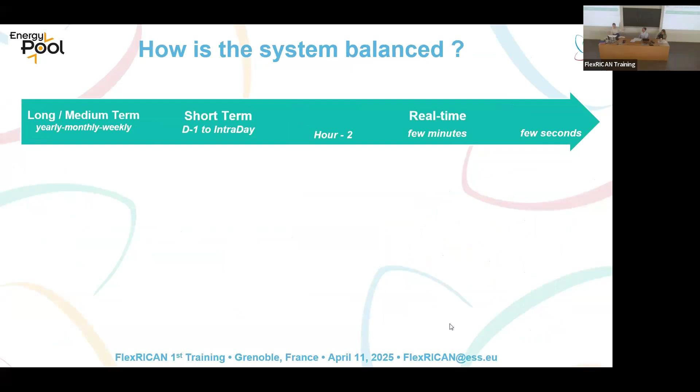Every asset needs to be attached to a balance responsible party, and they have a financial incentive to be balanced and usually penalties when they're not balanced. So how exactly does balancing work and how is it done? You have different temporalities. On the long and medium term and on the short term, it's the balance responsible parties that take care of the equilibrium. On the long term, they balance using futures and term markets.

An example is through EEX. And on the shorter term, so day ahead and intraday, they use the spot or intraday markets. An example of a platform is EPEX Spot. They use these markets to balance their perimeters, but closer to real time, let's say 2 hours before real time, the TSO is going to take over that job. The transmission system operator manages the balancing from about 2 hours before real time, the delivery time.

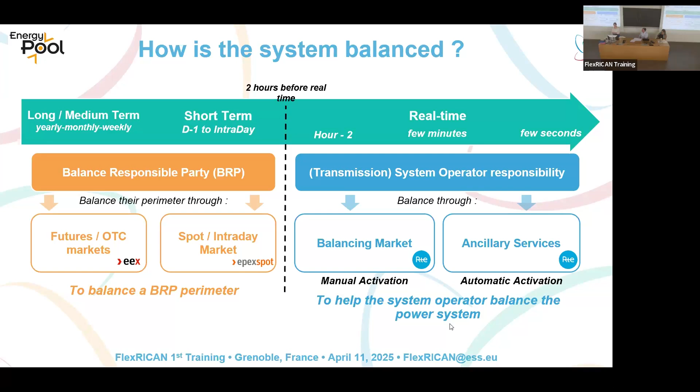They use balancing markets, where they procure balancing capacity and balancing energy, and ancillary services, which we're going to go over very quickly, which are services specifically tailored to manage the frequency of the network. This is all to help the system operator balance the power system. I gave the example of RTE, but it is also the job of Svenska Kraftnät in Sweden, MAVIR in Hungary, and ČEPS in Czech Republic. They all have that same job to balance the network on the short term.

So exactly what is flexibility and why do we need it? Marion already introduced the first definition. We can separate production side flexibility and consumption side flexibility, but technically they all work the same way in the end. For a production asset, flexibility is its capacity to increase or decrease its production to answer different signals. That can be market signals, the market price, or system signals, for example through the balancing market. Historically, production units are mainly used to procure flexibility in the system.

Now we see more and more demand-side flexibility appearing, which is the same definition. It's the capacity of a consumer to increase or decrease its consumption to answer system needs or market price. This is also called demand response. This is different from energy efficiency, which is more about lowering your consumption for the same output, if you will.

So this demand response can be done through peak shaving, which is you just curtail your peak load. It's quite simple. You can do peak shifting, which is reporting your load at another time. So you do not consume when the network needs you to not consume, and you will consume at a later time when the network doesn't need you to stop your consumption.

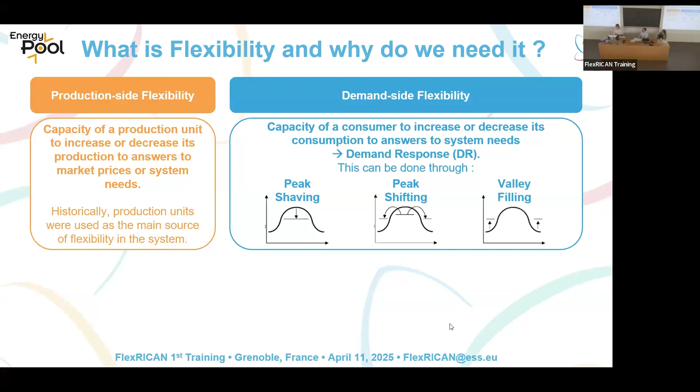Why exactly do we need demand-side flexibility now? So with the energy transition, we see an increase in renewable energy production and an electrification of uses in industry and in transportation. This leads to new challenges for the system. You have a decrease in production flexibility because most renewable energy is not very flexible. Mainly solar and wind production can be not very flexible. And you also have with the electrification an increase of electricity consumption, especially during peak hours.

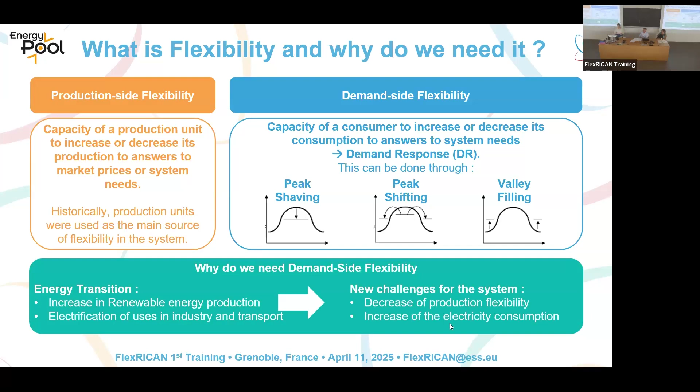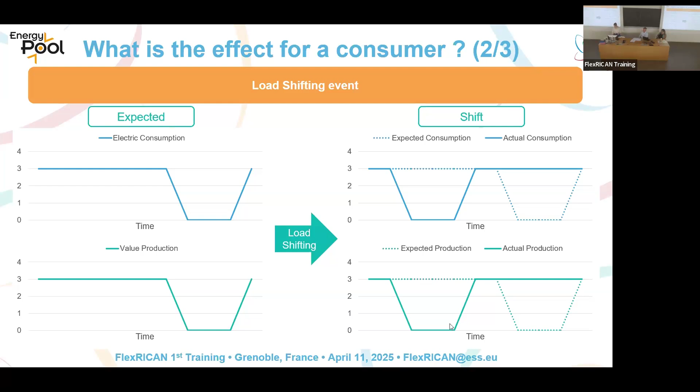You're going to shed your load here, but you're going to want to still produce your expected production. So you're going to consume at a time where you were not supposed to consume. This may not lead to loss in production, but usually you need to have a bit of rescheduling and reorganization.

Another final effect is, so I presented mostly the case of curtailment, load shedding, but there is also a type of flexibility that you can have, which is linked to continuous frequency adjustment. So this is not really just, oh, I'm just going to stop consuming right now. It's more of, let's say, I have the information about how the frequency is doing, and I'm going to adapt, usually in real time, my consumption to how the frequency is doing, so that you can help it go toward your 50 Hz. So this is a continuous service, we do it all the time.

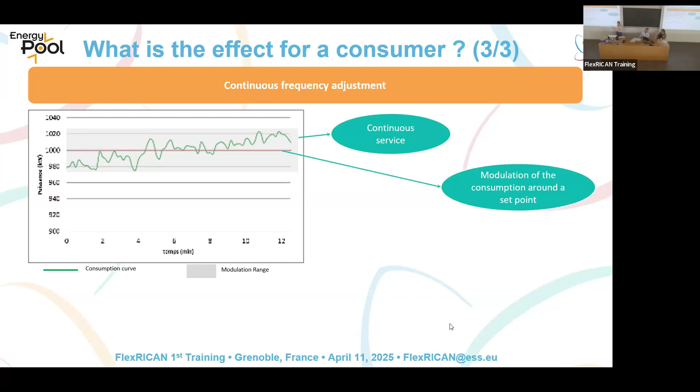You have a set point, which is usually the consumption when the frequency is, let's say, perfect. And you have a centered load around that set point.

This is the sort of modulation that is used in what we call FCR, which is Frequency Containment Reserve, which we're going to see a bit later. It's an ancillary service, and it's used to maintain frequency in the network.

So what are the different costs and benefits of flexibility for a consumption asset? Well, you can have a loss of production, you can have a loss of value creation, you have a loss of output in a way. You can have short and long-term need for a reorganization of the whole consumption, the whole production. And you also have potential investment to make, which are equipment. If you're going to do frequency regulation, you need to have an equipment that can follow the frequency on the grid. You also need measuring and communication devices if you're going to, let's say, sell your flexibility to the grid.

And it does have some benefits. It can decrease the electricity bill if you do load shedding, mostly. If you shift the entire consumption, then you can still decrease the electricity bill, mostly based on tariffication. You might consume at a time where it's cheaper to consume.

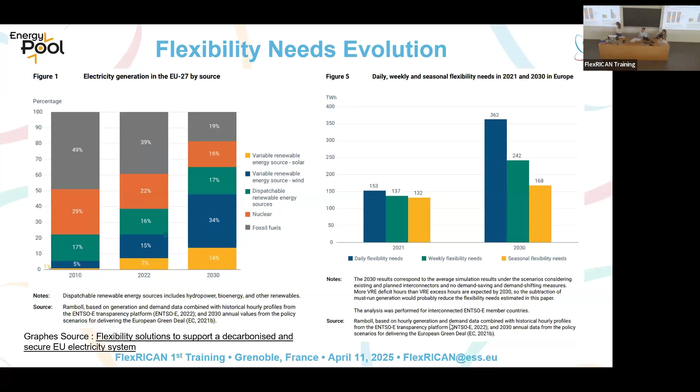And it is expected to go even up in the later years, which does have an effect on the flexibility the grid needs. As you can see, you do have an increase in flexibility needs, whether it's short term or also long term.

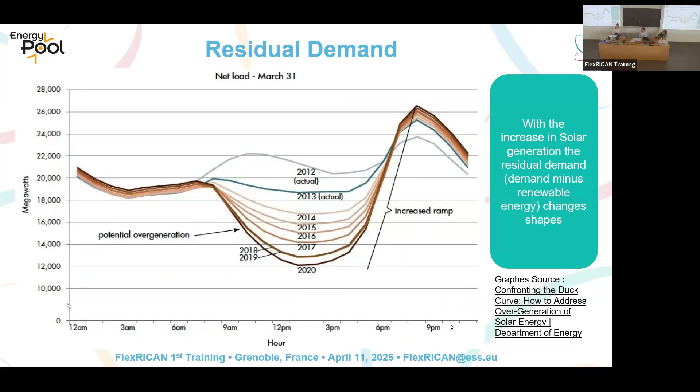I'm going to show you a bit of this curve. This curve is a bit of an old curve, but we still see the same thing happening now. This is the residual demand from solar production. It is to show how you need to shift your consumption with flexibility. We see more and more this form, which is sometimes called the duck curve, because it looks like a duck.

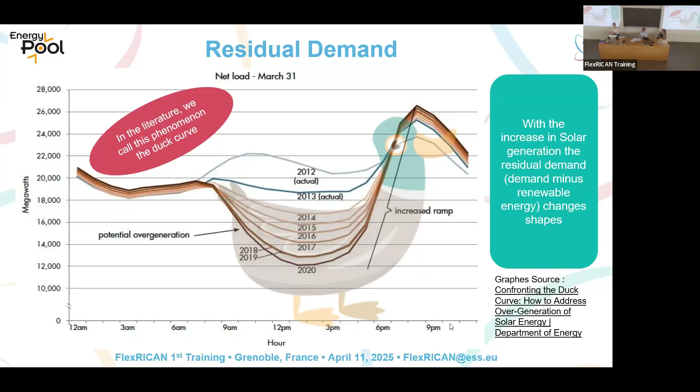And you see that with the increase in renewables, you have that residual demand that has this specific form, and that needs to be answered through dispatchable production. So you tend to have less and less production during the day, which is the peak production, but you also tend to have more and more consumption during the evening and a more rapid peak, if you will. You have that ramp that is increasing, and with the increase of this ramp, you need to have more and more flexible assets that are able to either produce electricity or lower their consumption very, very quickly. So this is an example of why exactly you need flexibility on the network.

Now I'm going to go over very quickly the difference between implicit and explicit flexibility. Implicit flexibility is something which is price-based. It modifies the consumption through the use of tariffication and price signals. The main example is if you have an electricity contract, you may have access to peak and off-peak hours to incentivize you to consume at some times rather than others. This is what implicit flexibility is.

You have also explicit flexibility, which is incentive-based, and that modifies the consumption through incentives, through a signal, and most of the time you have markets for those. These are more programmed, they tend to be contracted, they tend to be a bit more, let's say, certain. So these are different types of flexibility that also have different uses, as we can see.

So I'm going to try and break it down a bit. On top, you have the price-based demand response, which is the implicit flexibility, and on the bottom, you have incentive-based demand response, which is the explicit flexibility. And you have that triangle that shows the time of the planning and operation.

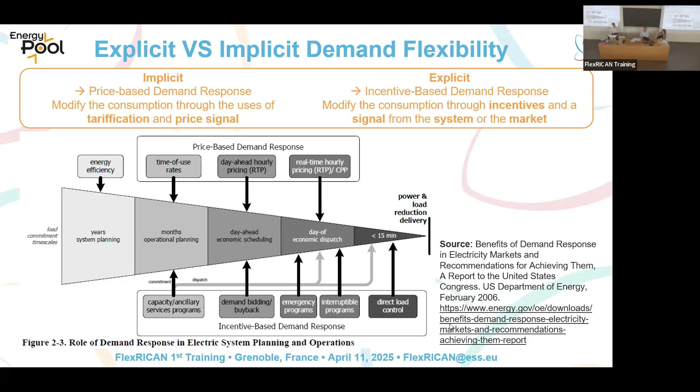So you also have some programs that are used on the long-term planning, but you also have programs that are used very, very close to real time, at a time where implicit flexibility cannot answer to system needs. So they serve different purposes.

I'm going to let my colleague present this. Yeah, on here, two slides.

To make it easier, we see the implicit flexibility as being the means to decrease the electricity bill. It's what you do behind the meter in order to optimize your energy bill, and it's up to you. You are not obliged to do that; you do it if you want. And then you have the explicit flexibility. This is something where you engage on providing a service, and you will be rewarded for that. And this is money that you get on top of your bill, so this is an additional income.

And this is what makes clearer the difference between the implicit and the explicit one. So this is how the grid operators are seeing flexibility. If you ask the Commission de Régulation de l'Énergie in France, they have a clear definition of explicit and implicit flexibility. Now, from a more sociological perspective, we are speaking within FlexRICAN about direct flexibility.

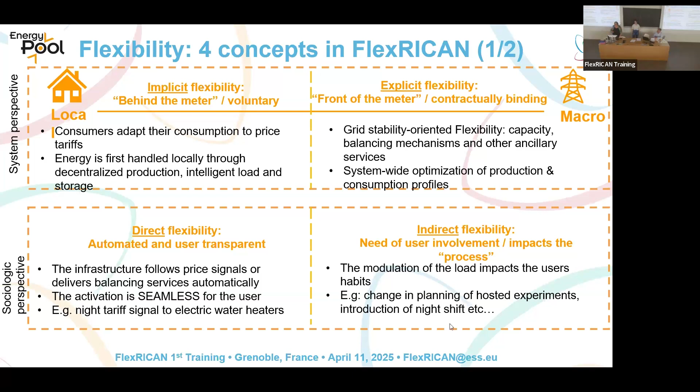This is the one that is automated and where the user does not need to change or act. And there is the indirect one, where the message goes to the user and the user changes their behavior and then modifies the consumption curve. And this is why we wanted to represent the different perspectives. They are either systemic or more sociological. And this is the basis for the discussion with François and with the teams within FlexRICAN about how we classify these.

And so we have four quadrants. It's like in electricity, where you have the active power and the reactive power. So we work in four quadrants: implicit and explicit, direct and indirect. And for each of these types of flexibility, we have some examples. And Séverin, who is starting his PhD thesis right now, this is a proposal for the basis of discussion about the definitions of the different categories of flexibility, so that we share a common language in the project.

So, in order to drive that point a bit, I'm going to give you a few examples of implicit flexibility. So again, everything is a question of timeline. You have implicit flexibility that is mostly going to be used on long-term planning of the system, and you have implicit flexibility that can provide a bit shorter-term planning, not short-term like a few minutes before real time, but usually a day ahead. So the most used type of implicit flexibility is the time-of-use one.

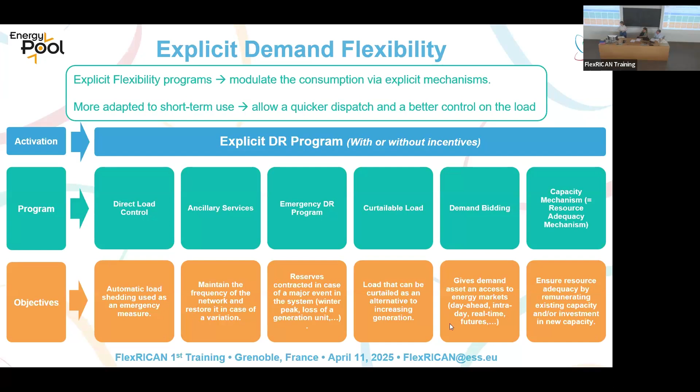So I'm going to do a bit of a focus on ancillary services. So again, those are the services that serve to maintain and restore the frequency of the network. I'm going to do a bit of an animation here. This is the European frequency, which is at 50 Hertz. And we're going to see what happens when you have an imbalance between generation and consumption. So let's say we have a big imbalance and the frequency dropped very suddenly. The first service that is going to be used is the FCR service, which is the primary reserve in a lot of countries.

These services serve the role of containment. So what it does, it just goes up to approximately the variation that happened, the imbalance, just so that the frequency on the network stops moving. So this is what is happening here. This particular reserve is a very quick reserve. Usually, you need to react in less than 5 seconds and need to be completely there in 30 seconds.

Then, once this has contained the frequency variation, you have another reserve that is used, which is called the aFRR, which is the automatic frequency restoration reserve. This needs to be fully up in 5 minutes, and the job of this reserve is to restore the frequency toward the normal frequency. So as you can see, you have the beginning of this, and the frequency is going to go up toward 50 Hertz. Sometimes the aFRR is not enough to make the frequency completely go back.

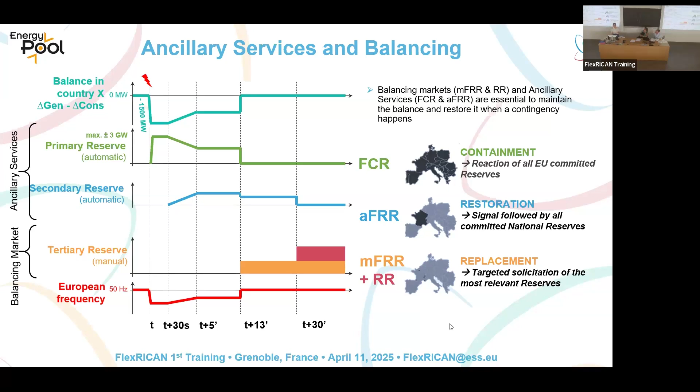You find them in France, you find them, I think, in the Czech Republic. You also find them in Sweden, again, except the replacement reserve. Those are European standards, they exist in most countries in Europe. As I say, they have different timelines. Again, I'm going to repeat myself, sorry. Those are European standards that are used throughout at least the synchronous area. They're also used sometimes in Nordic countries. So Nordic countries also have their own market for those ancillary services and mFRR.

The map is not completely accurate. It separates the Baltic countries' frequency from the continental area. The Baltic area doesn't exist anymore. Now they're synchronous with continental Europe. Okay.

So very quickly to summarize all this. Different assets cannot usually participate in all those services. It's going to depend on what they can do, and on a lot of technical constraints. So I try to give you a few examples with different assets, where they can participate, what they can do.

So the first one would be an industrial asset that can switch off with 30-minute notice and that would not want to be activated too often. This one, for example, would participate in the replacement reserve, which is the 30-minute activation time reserve, which, since it's a replacement reserve, is also a reserve that is normally not used too often.

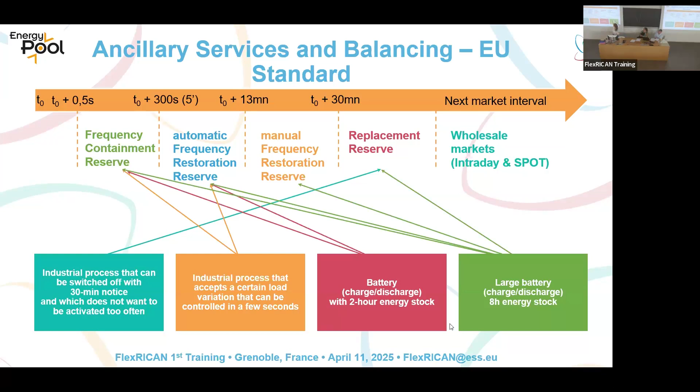And then you have the last example, which is a large battery with an 8-hour energy stock, which in that case, since it can answer very rapidly, but also for a very long time, can participate in everything. Of course, it can also participate in the spot markets, I just did not show it.

So I'm going to end very quickly, I think, with a short summary of what you can find in different countries. I'm giving the example of France, but I will also give you the example of Sweden. So in France, you have those four main reserves that I presented to you. They're not called FCR, FRR. They're called the primary reserve, the secondary, and you have the fast reserve and complementary reserve, but those are the same standards that I presented to you.

But you also have different programs. You have interruptibility, which is an interruptible load that comes as an emergency measure in France. It's also a form of what we call a strategic reserve because it is capacity that is contracted a year ahead to be sure to answer to major events.

You have what is called the AOFD, which is a complement of revenue for the capacity market. The capacity market is, again, the market where you will contract capacity. This is a market that is common for both consumption and production. I'm not going to go over it because we don't have the time. And lastly, we also have what we call the NEBEF, which is a demand bidding program that allows access to the spot market for their assets.

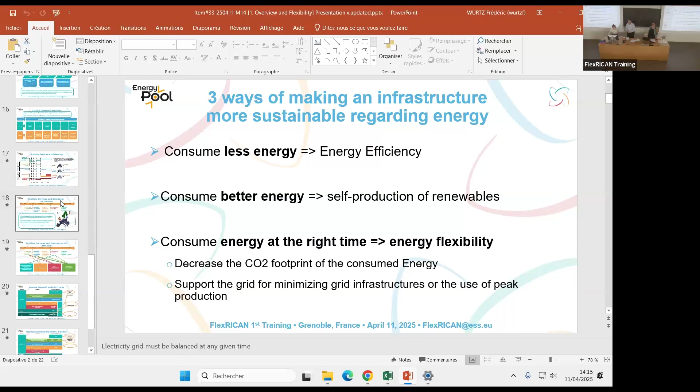My question is, you say that in a rare case, you will use the reserve, the replacement reserve. Sorry for the English. You say in case of a rare event. What do you mean by that? I mean, is it an event that happens every week, every year, or is it a real catastrophe? It happens from time to time. The red one.

Usually it would be a few hours a year, so not every week. I think it's approximately 10-ish hours a year. So it is a rare event, but it's still used throughout the year. It's not as rare as, for example, the interruptibility service, which was used this year, but hadn't been used before 2021. So this is very, very rare. This one is used throughout the year, but usually around 10 hours a year. Thank you.

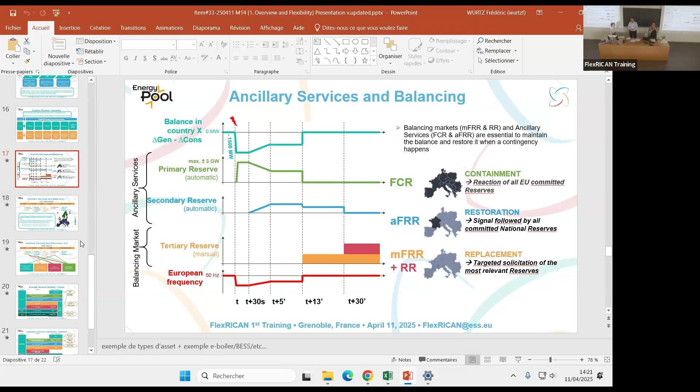And therefore, for example, maybe you had that classification, about FCR, the frequency containment reserve, the need for France is in the order of magnitude, correct me, of 1 gigawatt or a bit less. Perhaps Romain knows that. For France, FCR is almost 500, 600 megawatts, but that comes from an allocation for maximum criteria, being the two biggest plants in the whole continental Europe, which sums up to roughly 3 gigawatts. So it means two production groups over all Europe are just shedding from the grid.

The two biggest being large nuclear power plants. And then aFRR, the automatic frequency restoration reserve, is national. It's not a European cooperation mechanism, and this volume for the national basis is defined a few months in advance, it's oscillating between 700, 800 megawatts. So you know that they will be contractualizing in 2 months' time 700 megawatts. So that's how it's designed.

Okay, and so another question on the real-time price signal. So let's say you have defined the peak price and then the off-peak price, and consumers start shifting their loads to the off-peak price or the low area, and now the peak shifts because everyone is shifting their loads. So then you have to change the price signal again, just to control the behavior.

But if you change frequently, it may cause some inconvenience to the user. So do you have any comment on that? How do you set the price signal? You don't want to change the price signal so frequently, but still you don't want to put stress on the grid. There are different types of users.

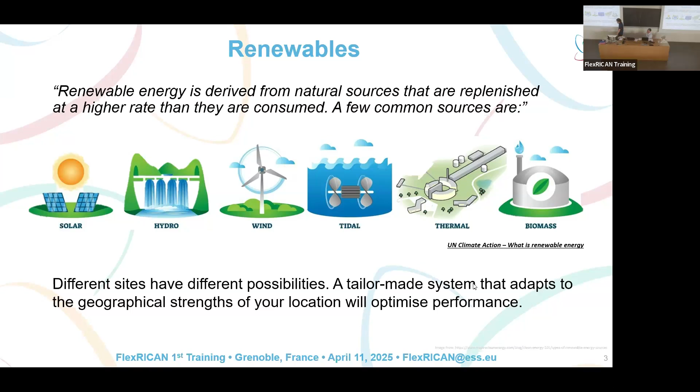So now that I've convinced everyone that we want a renewable energy generation system, how can we do it? What do we want for it? Well, the most important part is that we want our system to be relevant and to provide value. Simple. The first thing that we're going to get from it is a reduction in our environmental footprint. Of course, this is very important, but sometimes, sadly, it's not enough to convince everyone that we want to do this. So what else can we do?

Well, the way to make our system provide extra value is first to understand how the research infrastructure operates. What happens, right? Let's try to understand what the process is in their everyday life and how we can install our system to provide something extra and help them make their life easier or more effective, right?

So in terms of operations, we need to figure out what they're lacking, if they have any sort of deficiency or somewhere where they can improve, and we can add some value over there. It's also very relevant that if we're able to do this, we're going to generate high interest in the people working already at Research Institute.

For example, I'm just thinking maybe we can use data center cooling. It's something very important for a lot of people. If we can provide some sort of backup or make sure it's always on, that it's going to be completely reliable and robust, it won't stop, then whoever's working with the data center will also be very interested in that the renewable energy generation system works properly. Not just the system owner or whoever was in charge of the project, but also the people working there.

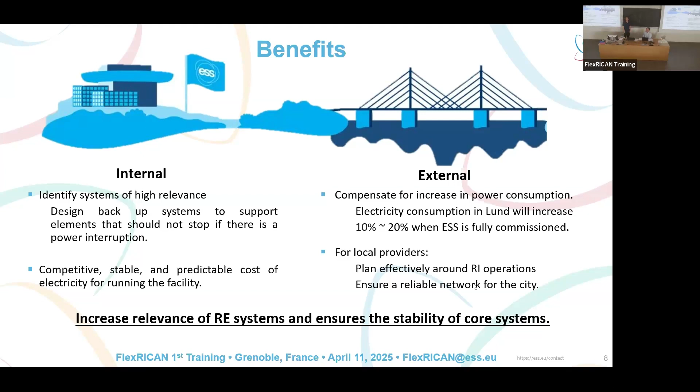And now, as promised, a very quick view. I'm not gonna go into a lot of detail how to use these tools. I just want to make sure everyone's aware that they exist. They're free to use, and if you want to dive into them, it shouldn't be that hard to figure them out. So some of the available resources are these ones.

I promise I'm not being paid by any of them to give them publicity. One of them was actually recommended by our team here, by Marion. K2 Base, I really like the system because it allows you to draw a solar panel installation right on top of your site. Sometimes this is very hard. It's very hard to size it correctly and know how many modules you would like to have on your facility.

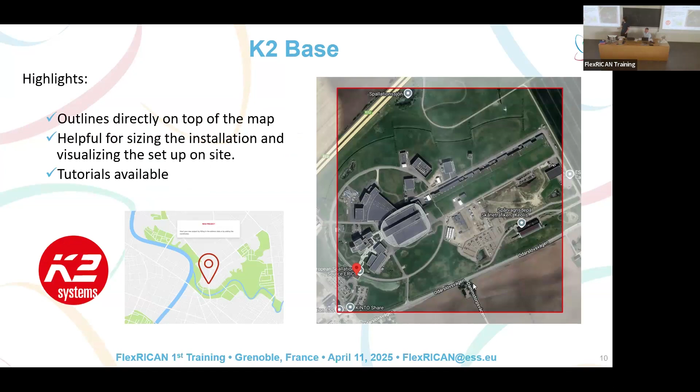So this tool lets you do it immediately. You just pick the location that you want, then you choose the kind of roof that you want. If you're not sure, go with the default settings. That never fails. It automatically accounts for snow, rain, geographic conditions, and then boom, here's your installation, ready to go and have it up and running in 2 days.

That's a lie, and I know this is being recorded, but that's how it feels. Once you have this, this is the end result. It'll even give you a bill of all the components that you need for mounting, for installing, so it's actually fantastic.

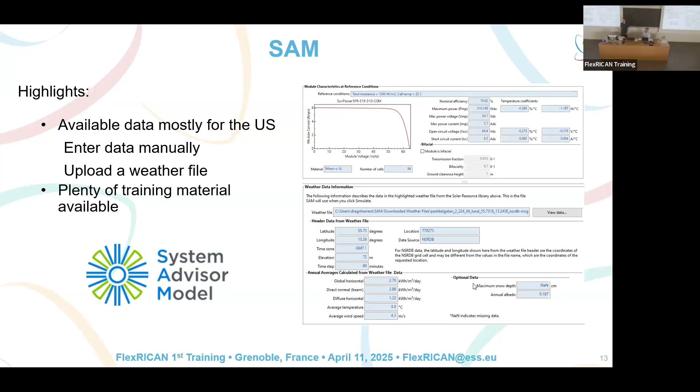In my case, I chose this. You can see it's my file for the location in Sweden, and then all the rest of the information is just extracted from that automatically. If you cannot find this, don't worry. Just choose a place in the US that's kind of similar to what you expect, and then it should work quite well.

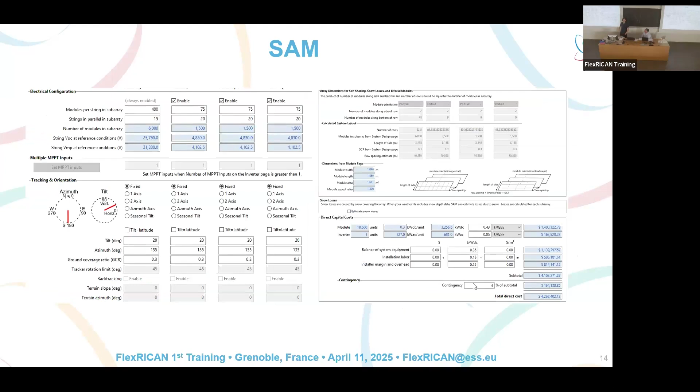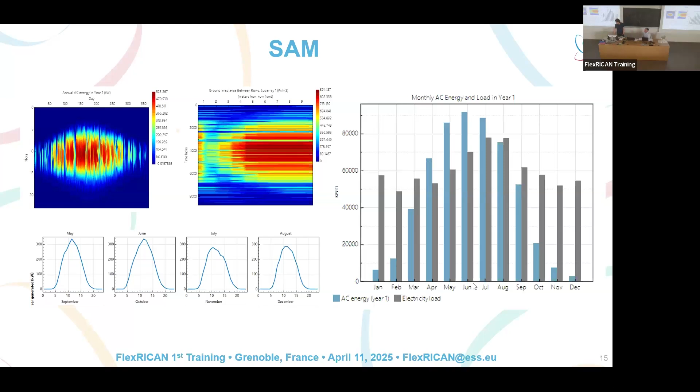The rest of the information is, if you know the configuration that you want, the orientation, how you want to place them, great. If not, you can just keep clicking next, and the default values will do it for you. The nice thing about this is that you get estimates for the whole year, the possible production you're going to get for a typical meteorological year, and they also divide it into monthly generation. So it's a pretty sturdy system. It has a lot of information if you want, but if you want to keep it simple, it's possible to do that as well.

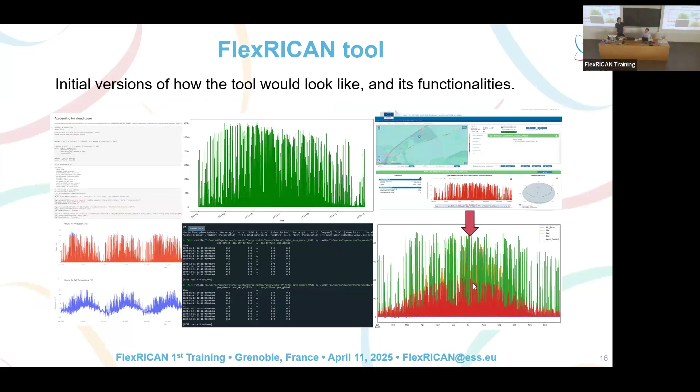We are developing our own resource here in-house. Our idea is that if you don't have access to the data or you don't know where to get it, this tool will fetch it directly. That's one of the things we're working on. And it's going to do something similar, analyze the expectation and the production that we're going to get over all this time.

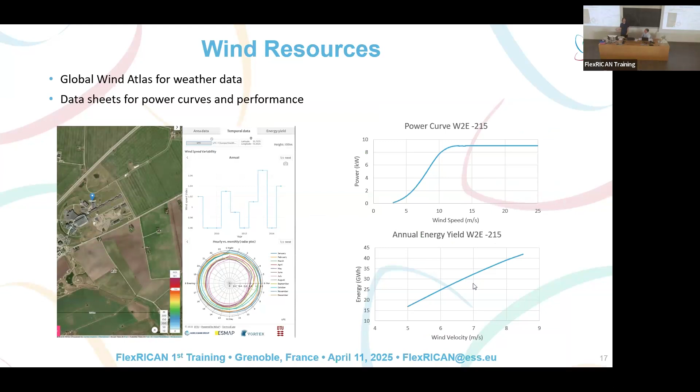All of this has been for solar, but there are other resources for wind. For example, the Wind Atlas, powered by the Danish Technical University. They do a great job updating it, taking care of it. You just go there and get your geographic data and historic data, and also take advantage of the data sheets. If you know which device you're going to install, the turbine, the panel, whatever, its data sheet has all the information you might need on power, sizing, operating conditions. So just go through it, and that's basically all you need.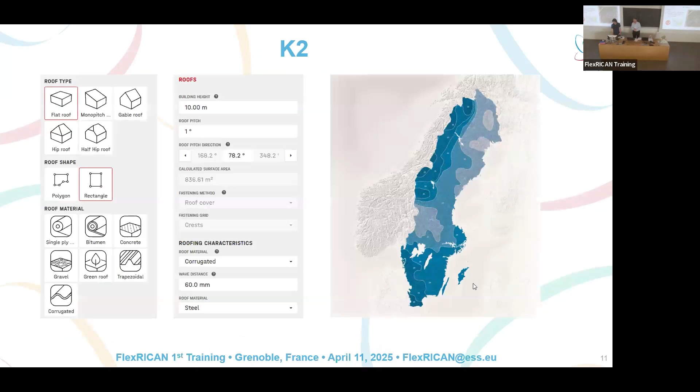Yes, thank you for the presentation. Can you go back to your slide with the big numbers about which building is consuming how much? Yes. The point is I have no idea. Is it that you need 100 gigawatt hours of heat in all your buildings? No, that's an estimate of the amount of heat recovered by our facility. But what is the local heat need? Oh, that's a great question. Those are the power consumption per year. And that blue one is the heat that is recovered per year. And what was the question?

If we know the consumption in Lund. That's Lund. 800 gigawatt hours. The heat that is produced or the heat that is recovered? No, the heat that is produced by the district heating network. And the heat that is produced by ESS, so it's 1/8 of what is needed. Okay, from what you said, you are interested in recovering the heat locally and not pushing it into the district heating.

No, the heat, we can put it back into the district. Of course, we use it internally, but then this amount of heat, of course, we send it back to the city. The part of not sending it back is more for the electric grid. The heat we do connect to the network in the city. And the question was about the heating needs for the city. So then that's 800.

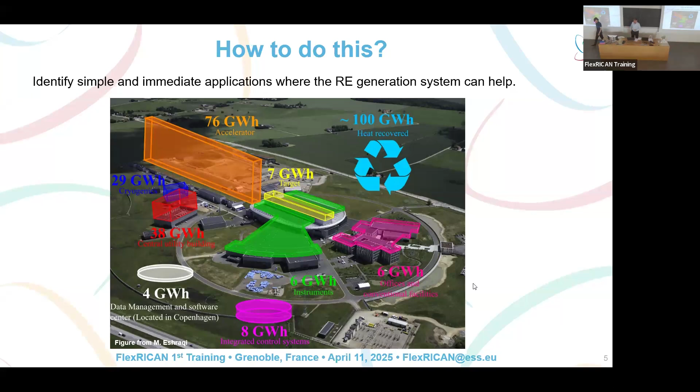So I'm giving this speech on behalf of the FlexRICAN Consortium. There are a lot of colleagues involved in this waste heat recovery. You have already seen some examples, but we will first go back to basics and try to explain why it is so important in the current energy transition. Let's go to definitions and basics.

So waste heat is the heat generated during a process but not used for the process. The waste heat is then rejected into the surrounding air or, mainly, water. It means it is rejected into the environment without rendering any service. There is a strange note, which has to do with the development of nuclear plants in France. In France, there is a special vocabulary.

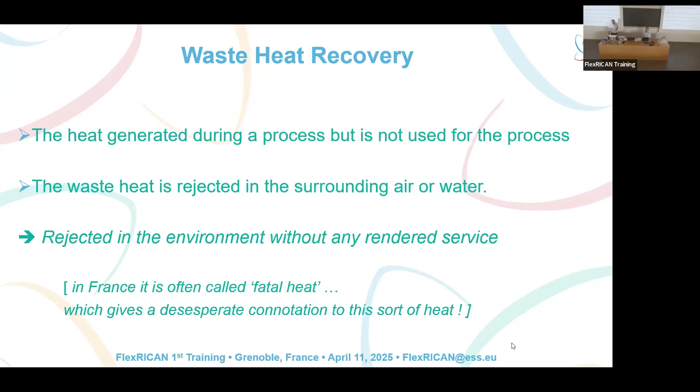It means that waste heat is not called waste heat, it's called fatal heat. Fatal means that you cannot do anything with it. It is not an optimistic view, but things are changing now, and so is the vocabulary. Ten years ago, everybody was speaking of fatal heat, and now it's waste heat also in French. So this is a good thing. It was the same with renewables. They were called fatal energy. So words are important in this case.

So, back to basics. We will start with the energy definition. Energy is very funny because it comes from ancient Greek and it means activity. We need energy, we need activity, we need development, and so on. We are in a society. It is a quantitative property that is transferred to a body or a physical system, recognizable in the performance of work. This term is very important. And in the form of heat and light.

So we see that there is no definition of energy. Energy is defined by its effects. This is the first thing. It means that it's a concept, so it's difficult to understand what it means. What is very important is that energy, as you know, is a conserved quantity. The law of conservation of energy states that energy can be converted but not created or destroyed. It could be disorganized, we will say, but it can't be destroyed or created. This is the law of energy conservation.

Just a point on the measurement unit. The official unit is the joule, but we are so much in an electrical society, and the use of electricity has been increasing for years and years. So it's much more practical to use the kilowatt hour, the energy spent by a heater of 1 kilowatt during 1 hour. I will use this kind of unit in the rest of my presentation.

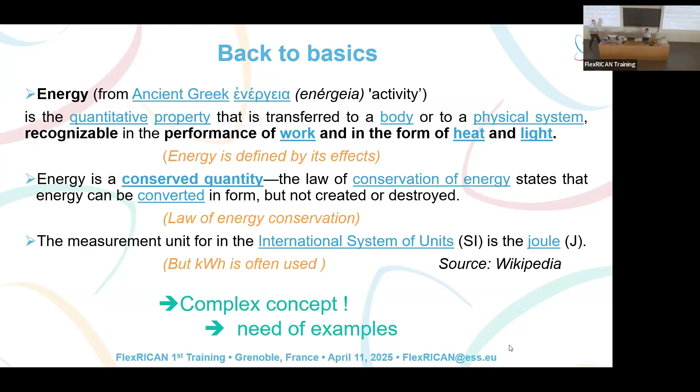A simple example: we are living in a given society, and for about 100 years we have been using such a device, such a process. Unfortunately, this process is very, very inefficient. Let's give numbers. You have 10 liters of gasoline, it doesn't matter, and you put that in your engine. If you burn it, thanks to the chemical energy contained in this product, you get about 100 kilowatt hours of energy. You put that in your car, and when you use your car, only 20 kilowatt hours are used for the movement. That is what is called work in this case.

So, as energy is conserved, 80% goes to the air. In which form? In the form of heat. It would be very nice, for higher efficiency, to be able to increase this number. Unfortunately, thermodynamic laws are against us, but we can also try to recover all this heat. And what is very funny is that the car has had about 150 years of development.

And there is almost no progress on this side, except for turbo engines, but there are rebound effects. So why? Because the price of energy is so low and seems to be free, because it was stored millions of years ago. And also, it's not so easy to collect this energy, as it is dissipated in the surroundings. There is no way to connect it to a centralized network.

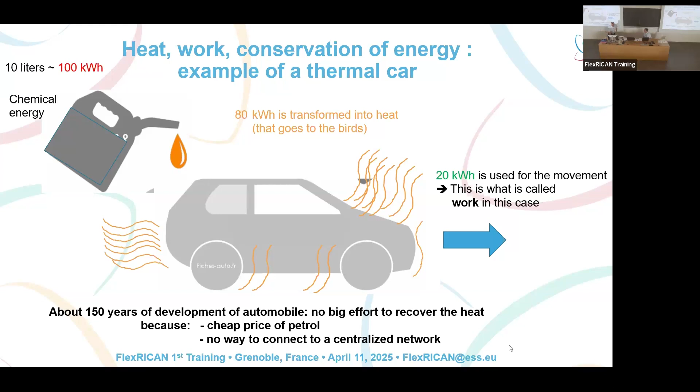So really, these are the two things we have to work on if we really want to have a way to recover this energy and use it later. So let's now talk about a specific example. Let's apply the law of conservation of energy to high-field magnets. I am working at the high-field magnet laboratory in Grenoble. So we are setting up high-field magnets.

In fact, these are only coils: we pass high current in these coils, and we want to produce a magnetic field. In fact, we put in 100% electrical energy. We use no gas or so on. We put electricity inside, and there is no work. Everything is transformed into heat. So it means that the researcher who is using the field is not producing any work. My director doesn't like that I say that.

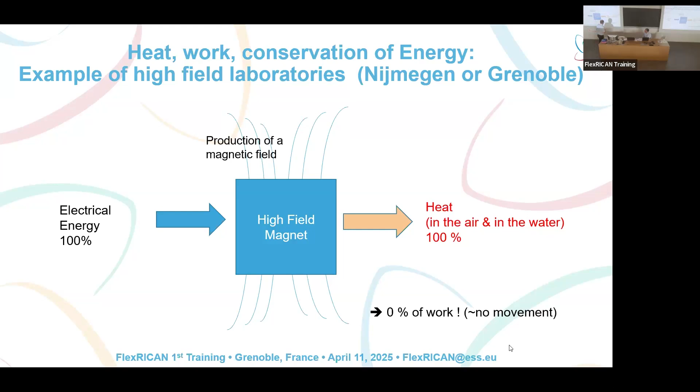So, okay, in the production of magnetic fields, there is no movement. So it's a static process. There will be a bit of energy at the beginning of the process, but in fact, when you are producing a field, there is no work. So it means that normally we should exploit all this heat for other uses. So this is a very peculiar case. So we have to work to find a solution. So 0% of work, no movement.

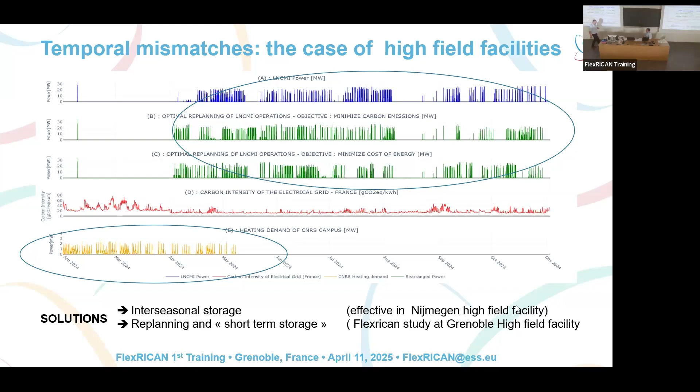So this is what is under study in the FlexRICAN project for the Grenoble case. Let's go to the example of EMFL. So it's a high magnetic field laboratory, exactly the same, no work. So I mean, energy, electric energy transformed into heat.

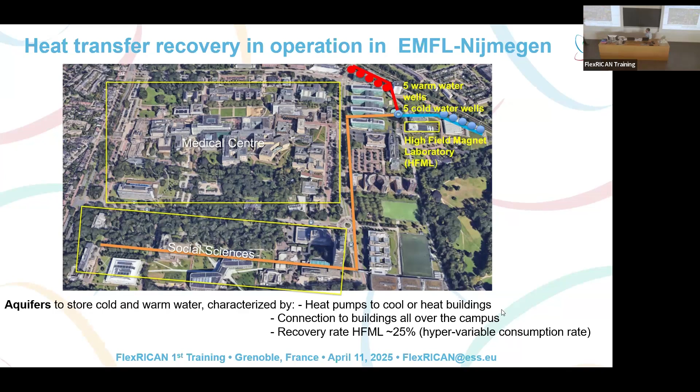So the laboratory is located there on the right of the presentation, and you see some blue circles and red circles, and they are representing wells in the ground in order to store water. So cold water is stored at 7 degrees, and warm water is stored at 25 degrees. And then it is connected to this heating network, and it goes in the big university center, and I encourage you to visit Nijmegen. It's a very nice university.

During wintertime, we use the water that was stored in the aquifer at 25 degrees. Then you have a heat pump to go to 45 degrees, let's say roughly. But as you are using a heat pump, you are also producing cold water. So it means that the cold that is produced at 7 degrees is re-injected here in the pits. And it will be vice versa for the warm during the summer. So it means that you are able to have an interseasonal storage, and that fits the needs of the district.

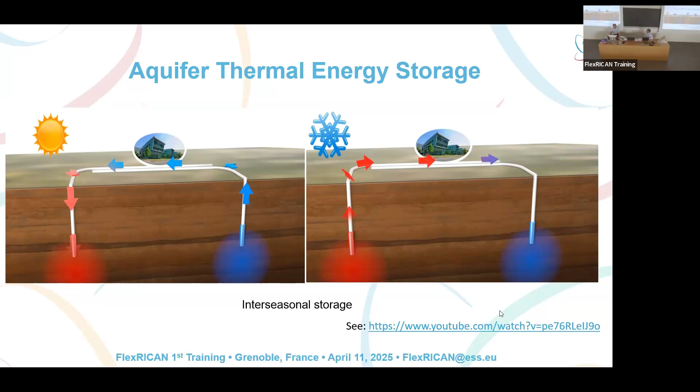And so this project up to now does not exist in Grenoble. I hope it will happen in the near future. Okay, let's go back to Grenoble. So we are now in the high field laboratory in Grenoble. So you see the place it is located. So we take benefit of the water that comes from the river. We inject the river to the heat exchanger, and then here we have a closed loop of deionized water to cool our magnets. And then again, all the water that is warmed up by the magnet is rejected to the river, so 100%. And there is no recovery.

Here, yesterday, the group visited the project of ESRF, and now the ESRF has a new system in order to recover their wasted heat, but up to now, it's only 5 gigawatt as compared to the 34 gigawatt that are produced. Because they are not connected to the heating network up to now. Perhaps it will come in the future. It will be a nice thing because it will help to have a better rate.

Here we have a nuclear reactor, and so it was decided at the beginning that they will not recover the water for safety reasons. It can change in the future. So it means that here on this presqu'île, you have more than 100 gigawatt of lost energy, and it is about 1/8 of the need of the global city. So it's a nice project to consider, I think.

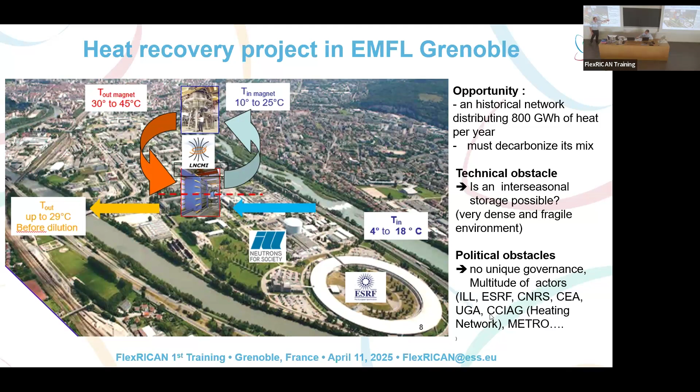Another thing here are political obstacles because as you have seen, we have to have a kind of trade-off. We have to change the way we are doing science to integrate another company, I would say, like the Metropole or the heating network in the thinking. So this is not an easy job, and most of the time, all the projects have political obstacles, as it is quoted there. Okay. If we go a little bit deeper, there is also intraday temporal mismatch.

So it is really the case for high field magnets because it's a place where the researcher is defining the consumption of energy. So what you see in blue is in fact the power that is used at the lab. So you see that it's very intermittent, and what you see in red are the needs for the heating. So it is during autumn days, and this is the need of heating.

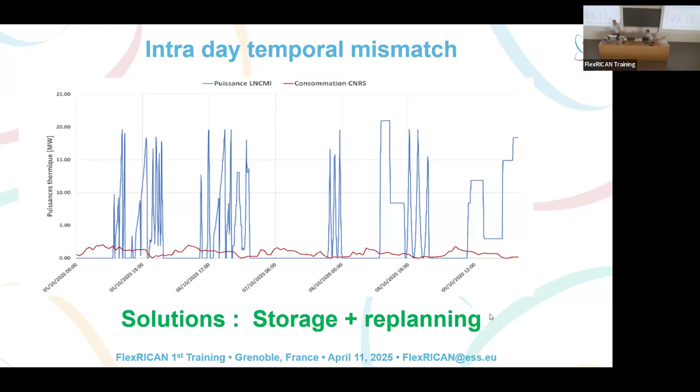What you remark is that there is a discrepancy in the level, so it means that you have to transfer high flux of energy at each moment, and this is a nightmare. And also you have discrepancy in time. Here there is no field, and you have a big need of heating. So for the solution, we need storage again, but we need also replanning.

So an example: then the installation gets more and more complex. Here you have the existing laboratory. It's very simple. You have a magnet, you have a deionized loop here, you have the river loop there, you have a magnet that takes all the electrical power.

But then you have to create all these parts because you need storage, because there is temporal mismatch, as you have just seen. But the level of temperature is not that high, so you have to have a heat pump, sorry, it's in French, so heat pump to go to the network, that is a historical network with temperature as high as 85 degrees.

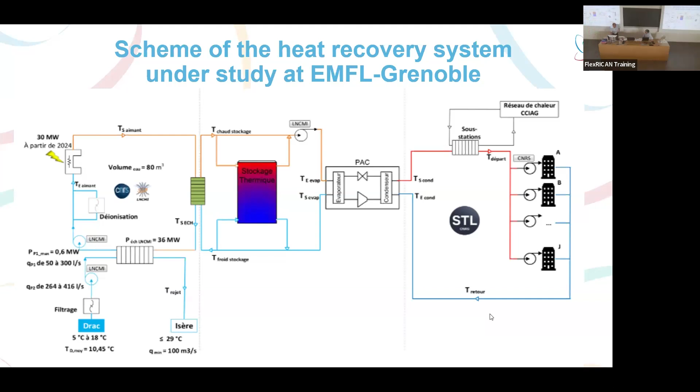So here, that is quite interesting, it's a kind of simulation of a storage that is installed in the installation. It's a simulation, we have no storage, but we are able to, you see, to report this energy some hours after, and then to cover the need of the heating system, thanks to this peak of power.

A very inspiring project is the one of Brest. It is really what is needed in Grenoble, but it occurs in Brest. So this tower is a reserve of heat to heat the building of the university in the morning. And I encourage you to have a look on this project. You have the link on the presentation too.

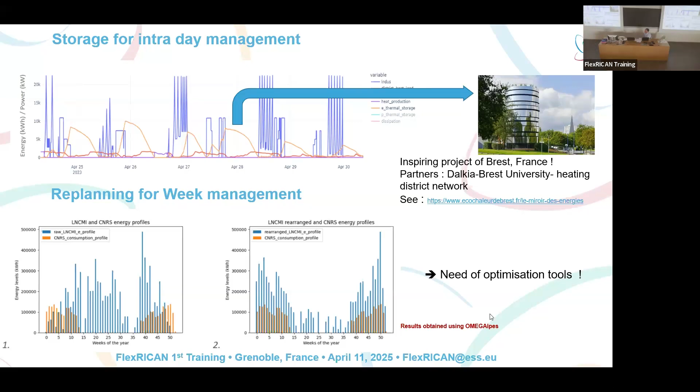Of course, this is for the storage, but you can also replan. So these are results that are obtained using OMEGAlpes. So it's suggestion of replanning of experiments during the year to have a better correspondence with the need of the network. So this is ongoing work with some people involved in the FlexRICAN project.

So I will not go into detail because we have already talked about this example, but the problem is the same at a larger scale at ESS, European Spallation Source, now in preparation in Lund, in Sweden. There are some common features. The heating network is about the same as far as the quantity of energy distributed is concerned, and the technical obstacles, so studies are in progress, as it was presented by Diego.

Could the district heating network be expanded? Because you have seen that the quantity of energy available is enormous. It's 1/8 of the total energy distributed by the network. Is an interseasonal storage feasible? Could the excess heat be used for absorption cooling in summer? I will not go into details.

One thing that has to be said is that today, in these years, we are in a preparatory phase. So the accelerator is not in operation, but still there is an annual consumption already of 34 gigawatt-hours, and already about a third is transferred to the network. So it's a first step, and it has to be continued for the years to come.

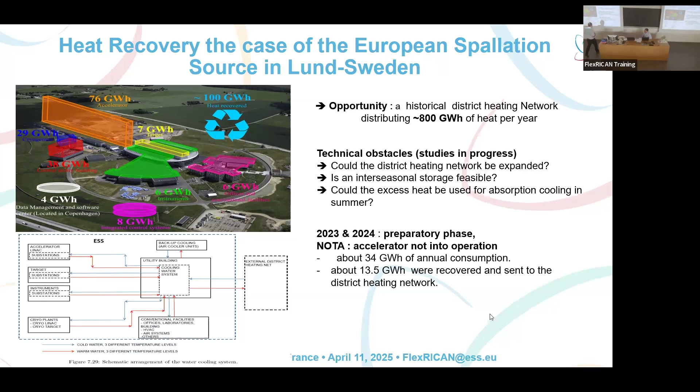Of course, this is not a simple problem. This is why I show you the problem of the storage, and we need optimization tools. For this project, we have chosen the OMEGAlpes tools that are developed here in this school. And this is very interesting because it integrates quite easily the constraints of the different actors. You have understood that the problem of heat recovery is that you are not deciding alone. You have to work together, and this is always difficult, and it leads to a lot of energy also.

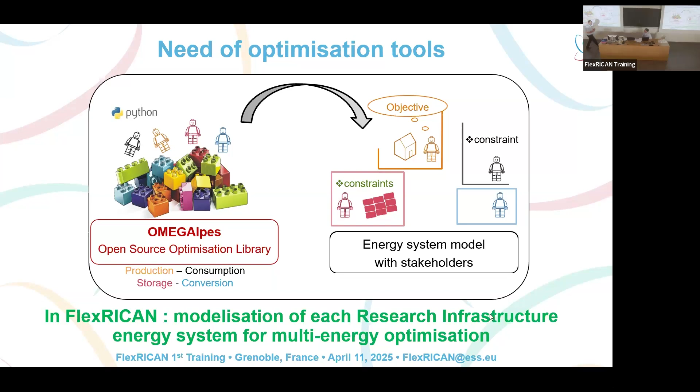This system permits to integrate constraints and objectives in the energy system models, and then we can test different scenarios and propose them to the different stakeholders. So it's a very nice pedagogical tool to work together to find a solution to set this kind of valorization process in operation.

So to summarize, we have discovered some heat recovery ingredients. We need storage, we need replanning, and this was also the question of Philip, how the research needs are defined. So this is why we need an optimization tool that takes into account all these constraints, without any judgment. I mean, stakeholders are respectable, and so we have to listen to all people.

Of course, to lower the investment cost and gain in efficiency, the heat recovery question must be integrated into the early phases of the construction of the facility. This was not the case at the high field in Grenoble. It was better the case in Nijmegen thanks to the active district, I think. It is better the case in ESS, but it's not perfect.

And yesterday we had a presentation by ISIS, and they are really thinking at the beginning for an instrument that will be in operation in 2040. And we hope that this work could be useful for this kind of new research infrastructure. So the idea of FlexRICAN is to set recommendations for future research infrastructure, and this will be one of the key outputs of FlexRICAN.

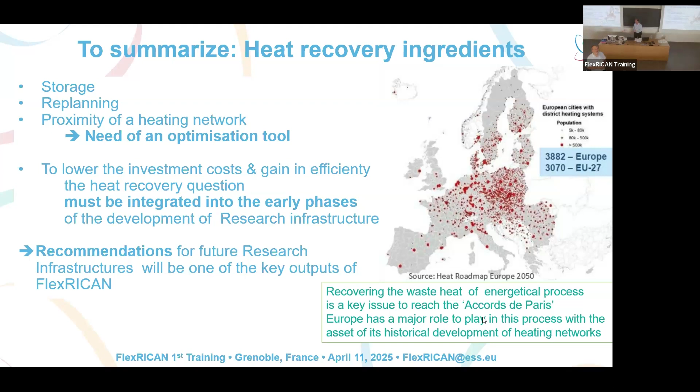Just a small comment: it's not 800 gigawatt hours. Sorry? The heat recovery is 100 gigawatt hours, and that's for 2 megawatt power operation. You said 800. 800, I said for the Lund district heating. The Lund district heating is distributing 800 gigawatt hours. This was just what I meant. I'm not aware of that. Okay. Or you can discuss with your colleague from Grenoble. These people are from the Grenoble heating network. It's the same order of magnitude. Okay.

I see there are no questions in the chat, but here's a question. Did you think of other uses of heating, like agricultural or industrial use of the warm water that you have? On our side, no, because it's a very dense environment, the Presqu'île, you have seen the photograph and you know the place. And it's quite difficult to transport it. There is a heating network existing in Grenoble, and it's distributing heat for heating.

We had discussions in the past to create a swimming pool, but the field belongs to the university, and this was not the priority. So it seems to be difficult to have some agriculture application in this place. But I'm not a specialist in that. You can propose that to the next board.

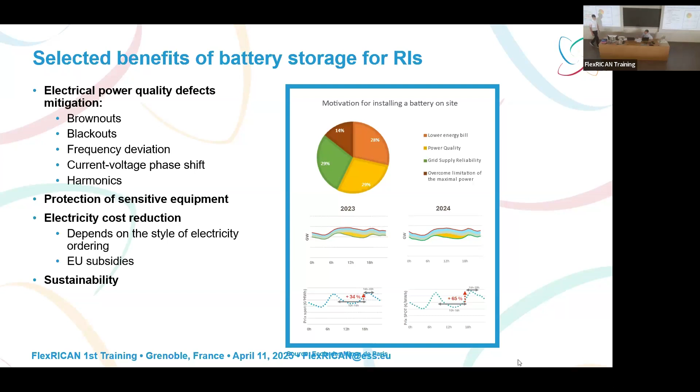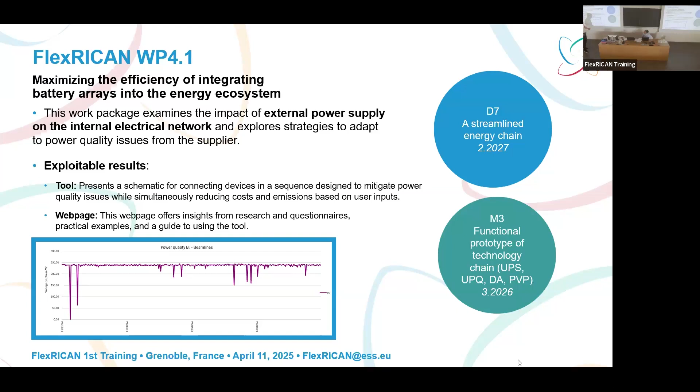You see there are some blackouts, brownouts, and all these quality issues are problematic because some equipment might be damaged, some equipment might stop, and therefore, for example, stop the experiment when the cooling pump stops. So this is a problem for us. The other way to look at this is from the Energy Pool side, or from the trading side.

When you have a lot of energy, how do you sell it? So you need to look at the markets, see all the services that you can provide, and this was in the presentation before. This is just a small recapitulation. There are some primary, secondary, tertiary services that you can participate in.

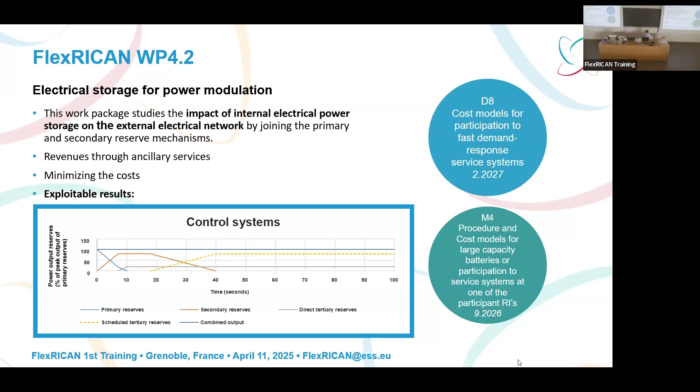So what is energy storage? Energy storage is when you store the energy at one time and use it at a different time, and the device that stores this energy is a battery. You're gonna have different kinds of batteries. You have thermal batteries, but I want to talk about the electric batteries, and especially stationary. You have a lot of others like electric cars or consumer electronics.

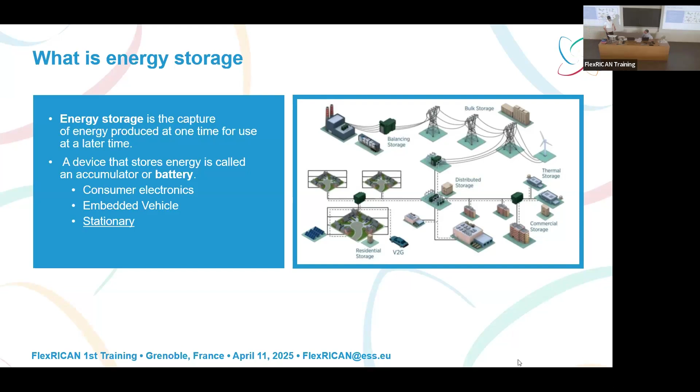But for the RIs, the use case that we want to talk about is the stationary. But in the future, maybe the cars will also be used for RIs to stabilize the grid. We will see. So there are a lot of services that can be covered by batteries. I will not go into all of them, but you can participate in peak shaving, peak distribution in time, or the mitigation of energy faults, or there are many others, and it depends on the market you are in and what problems you want to solve. For example, you can have an island and you need to create a local grid and you need to think about it differently.

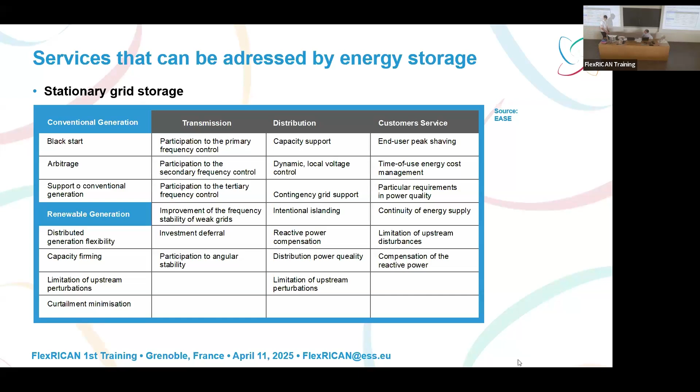So how to think about this is kind of our point of view. These are the power quality problems, how to think about the problems. Because it's easy to buy a large battery and just plug it in before the research institution, but this might not be the most cost-efficient way to do it. So first of all, you need to know what your problems are. So these are some easy steps to do. You need to get the data, evaluate it, and then do some risk assessments to see what your problems really are, because not all problems need a solution that might be costly; there might be different ways that do the same trick for less money.

So here I would like to show you the different technologies that are available, or how to prevent some of the problems that you can have. The first one is you just have a battery and how you scale it. For power output or storage, it can cover from when the failure occurs for hours. I don't think there are such large batteries, but maybe you can. But what you can also have, for the problem that we have, the brownouts, is low voltage ride-through. This is when you have synchronous motors running and the voltage drops. They'll cover the voltage drop for a few milliseconds or hundreds of milliseconds, and this might prevent the brownout from propagating into your grid and creating problems. It is not enough to cover blackouts; the maximum time is seconds. But for some use cases, this is perfect.

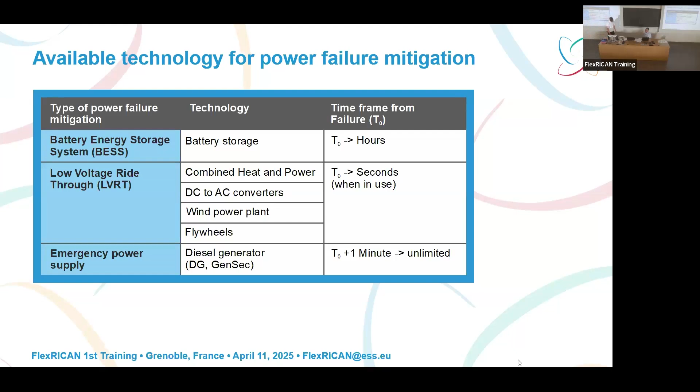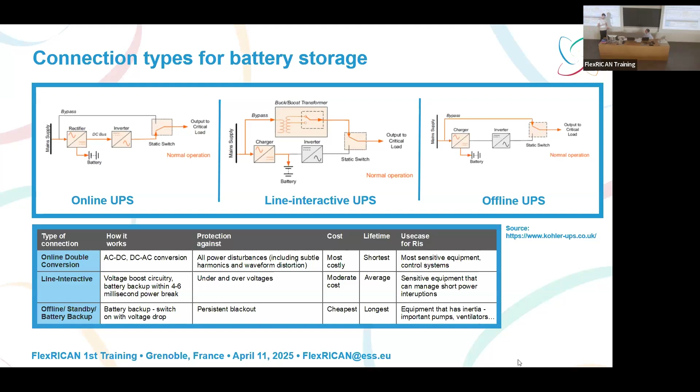Okay, so there is also how you connect the battery. We have online, line interactive, and offline uninterruptible power supplies. Each of them has its advantages and disadvantages. For example, the most critical equipment should be on an online UPS. There's the AC-DC and DC-AC conversion. It creates a perfect sine wave, and this is the solution for critical equipment. But if you have, for example, a ventilator that has some inertia, you can just use a cheaper offline UPS. When the power drops, it goes from powering from the grid to powering from the battery. There is a delay, but the ventilator doesn't care because it has some inertia, so it will just slow down a bit and then go back up. There are a lot of technologies to store the energy.

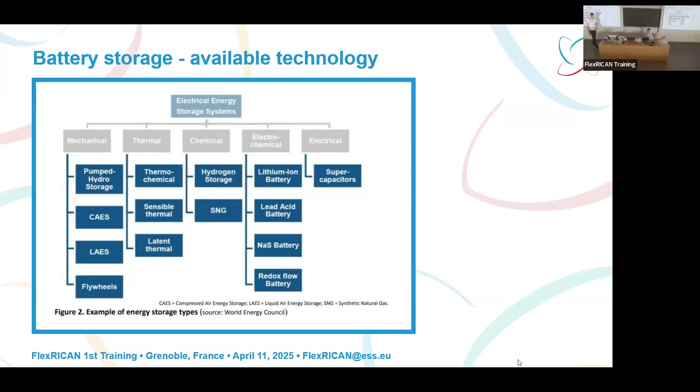It depends on multiple factors, and I would like to just talk about the electrochemical ones, especially about the lithium-ion batteries, and I will explain why later. But just to mention hydrogen storage, because it's popular for large storage of hydrogen to use on site. It is not economically feasible because the energy that you put into creating hydrogen and then going back to electricity, it's around 40% effectiveness. So it is not the best solution.

When we are talking about the solution, welcome lithium batteries. Lithium batteries are one of the best kinds of batteries. There are different types of lithium-ion batteries, but they really have the economy of scale because of the car industry and stuff. So there is a lot of research done, a lot of new materials used, different sizes, tests, longevity improvements. So for most use cases, lithium-ion batteries are the best solution. They are also getting cheaper because of the mass scale of their usage.

There are some drawbacks. First and foremost, it's the safety concerns. Then there is the environmental impact, that you need to mine the stuff. It's not recycled yet at scale, and they are temperature sensitive.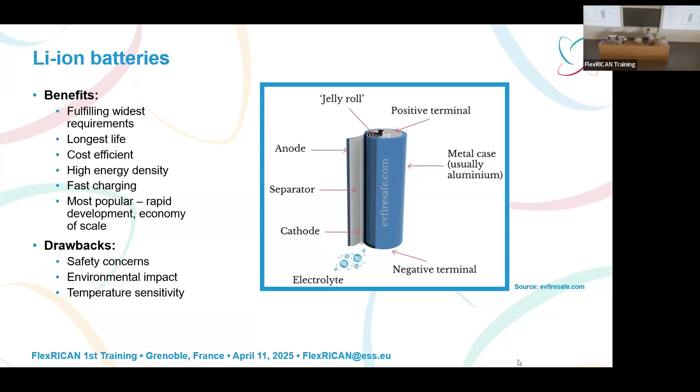So for the safety, there is lots of stuff that has been happening to prevent what's called thermal runaway. That's when it heats up in a way that it catches on fire, and you have seen all the videos of the burning cars. So there is lots of stuff to mitigate it on each step. I'd like to give one example that I think is funny. In the news, it was stated that some car company is putting exhaust pipes on electric cars, and it is one of the solutions to prevent the flammable gases from concentrating inside the car, so we just put it outside.

So there are lots of solutions, and one critical thing is that there needs to be clear certification of the batteries, to tell people, okay, this is a really safe battery, and we have tested it in a standardized way, so you really know that it's safe. Because if you don't have that, then you are just guessing.

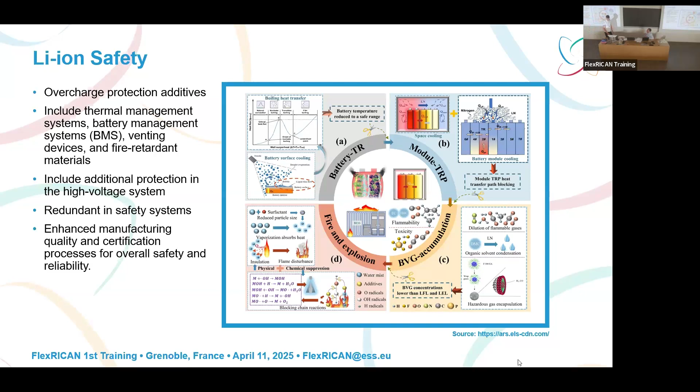So for the recycling, we are recycling a lot of materials from the batteries. Sadly, for the high-value materials, it's not yet as good. There are different ways you can recycle the batteries. For example, there is the regeneration of cathodes, but the problem is that the cathodes are not standardized, so you can't use it on all the batteries. Each method has different problems, but it's a large market, so we think that it will be solved in the near future.